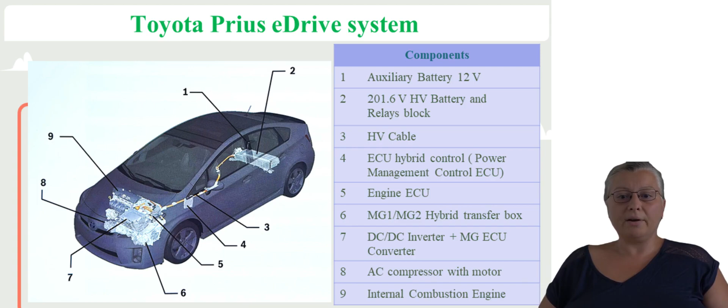I am sure by now you are all aware of the initials like ECU electronic control unit, HV high voltage, MG motor generator, DC direct current, and so on.

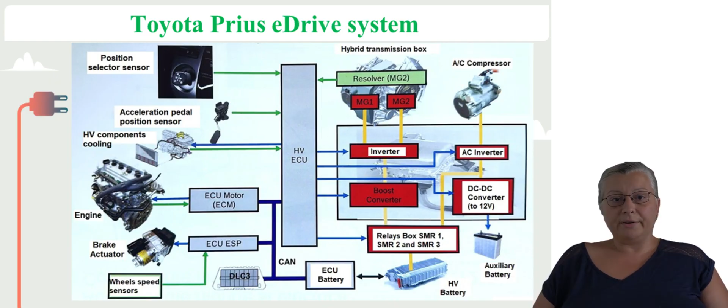And we can also see the hybrid transmission box, AC compressor, inverter, AC inverter, boost converter, DC-DC converters, relays box to HV battery and auxiliary battery. You can see all these notions are very familiar to you, but this is how Toyota Prius arranged them in their cars. Next, we will see the components of an inverter for Toyota Prius, Auris and Lexus.

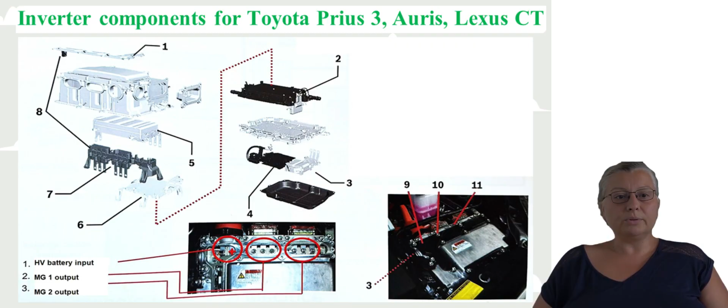We can see here the HV battery input, MG1 output and MG2 output. In this slide you can see all the components explained. I am sure that by now you all know these components from the other modules, but if you don't, please take another look at it and learn them very well.

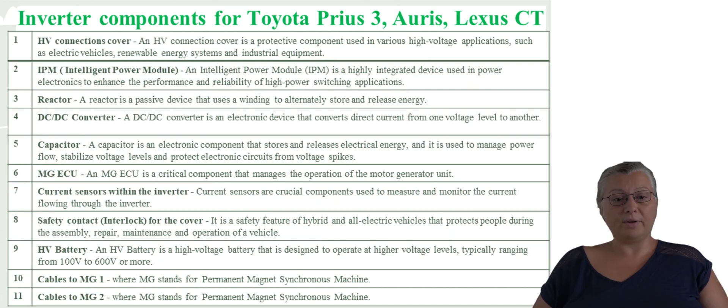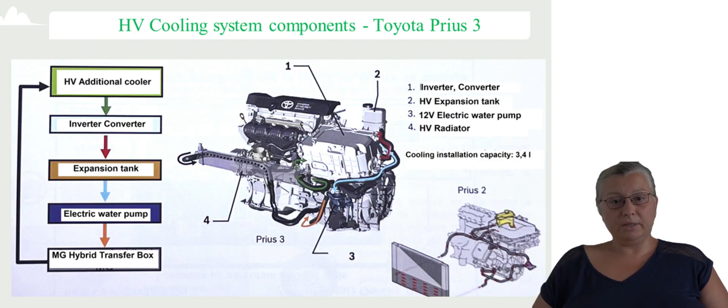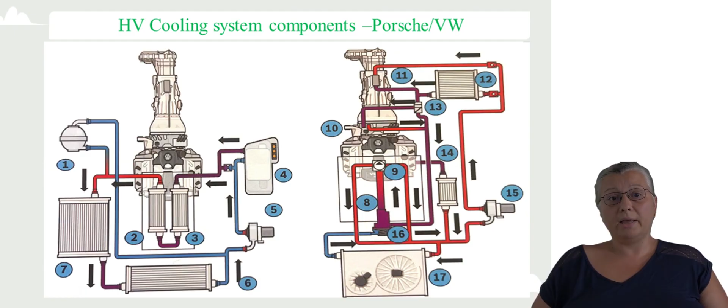HV cooling system components. In this chapter, I want you to see the difference between the HV cooling system in Toyota Prius, as you can see in this image, and the cooling components of a Porsche Volkswagen. You can see the two manufacturers have HV cooling systems that differ very much. For example, the Porsche cooling system is much more complex than Toyota's.

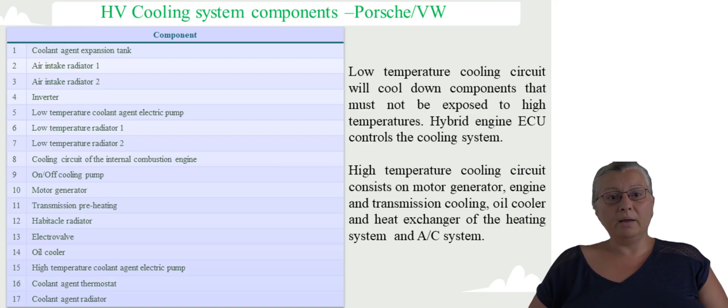We can see here all the main components and what they do. Please take a very good look at them and try to understand. The lithium battery components for Mercedes-Benz and BMW.

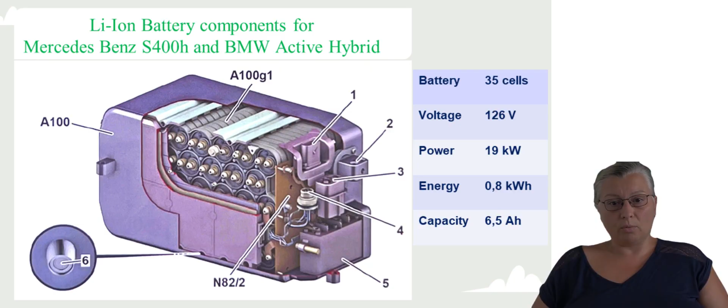We can see the 12 volt connection with battery management ECU, connection with coolant agent, HV electric connection to the DC-DC converter, protection relay, ventilation support with ventilation membrane and disc, HV battery module, HV battery, and ECU battery management, BMS, one of the most important components in an electrical car.

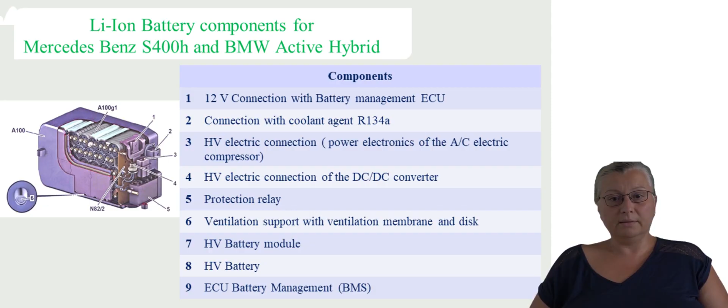Lithium battery components for Nissan Leaf. As you can see, another comparison between three important manufacturers, Mercedes-Benz, BMW and Nissan Leaf. Of course, as you may know, the R&D departments of BMW and Mercedes-Benz work together on electric components, and this is why they use the same lithium battery.

But as you can see here, Nissan Leaf, another big manufacturer, decided to go with another kind of lithium battery, and here you can see exactly the components.

Lithium battery, service disconnection, front right battery pack, battery temperature sensor, main relays box, front left battery pack, battery temperature sensors, lithium battery computer, back battery pack, battery sensors in the center and on the right.

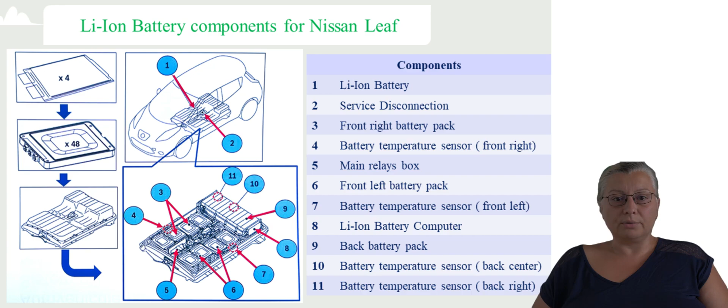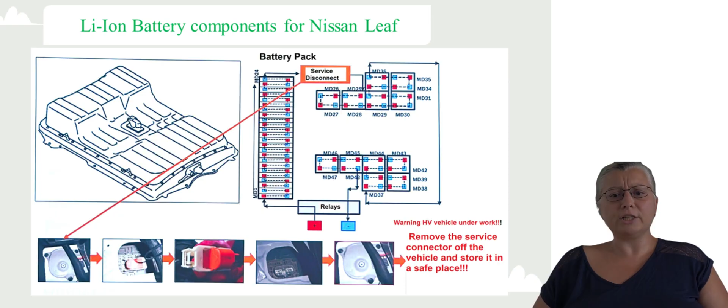Here is how to disconnect the HV system. It is very important, as you may know from module 1, that before starting to work on an electric vehicle, you must disconnect the entire high voltage system. So remove the service connector off the vehicle and store it in a safe place in order to start your operation, repairs, maintenance, or whatever you have to do.

Good job! You completed module 5. After reading this module, you can observe and understand the differences between theoretical and practical high voltage components. Every manufacturer has adjusted the general principle of HV components to better suit its purpose and to offer a competitive HEV that will ensure profits and a good place on the EHV market.

Here is a little assessment for you and the answering keys.